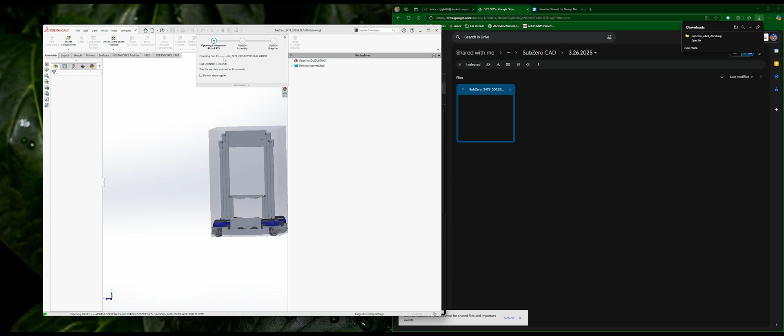A quick trick to find the one we're after: click on size, and there should be this Sub-Zero 2478 2025b dot SLD ASM file, that's a SolidWorks assembly file. Double click it and it should appear. Just wait for it to open, then a couple things to double check.

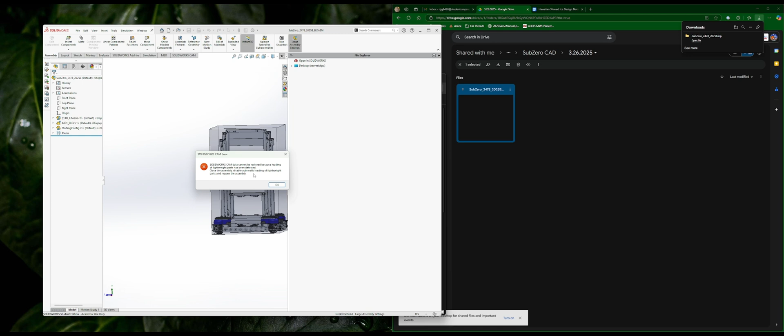This is all right, this just means there's probably a part that has some SolidWorks CAM data, and I have no idea what those parts are. You can just click OK, it doesn't actually affect anything.

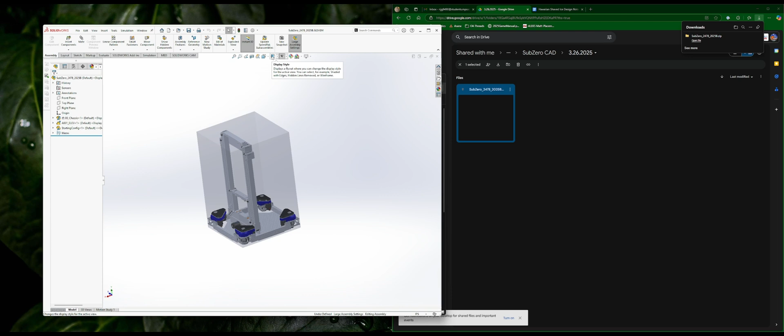Now something to check would be large assembly settings. You want that turned on, because otherwise it's atrocious to try to work with, so make sure to do that. We also want these lines, so you can maintain both by navigating to this cube and clicking the shaded with edges option.

Now you can see it's buttery smooth, even with your sub modules, which are the highly detailed things causing a lot of the lag.

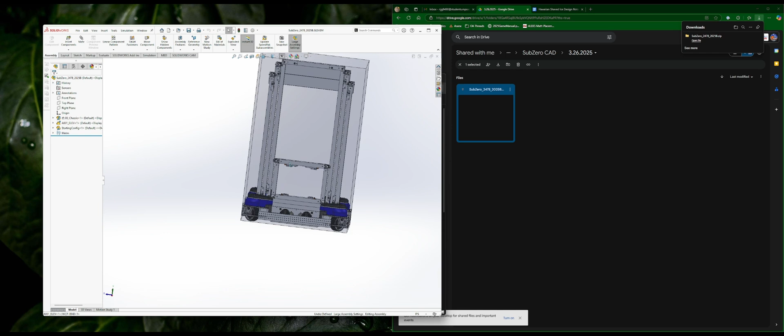As you can see, it has an elevator on it. We actually do not need that. If you want to play around with this elevator, go for it, it would be this one. But we don't need that, and we also don't want to be in this Sub-Zero 2478-2025B SolidWorks assembly file.

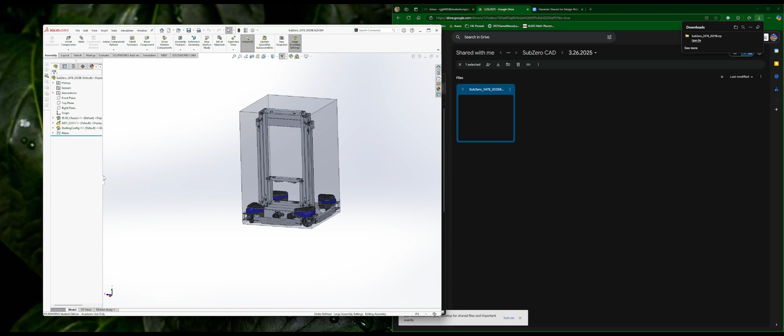We want to make our own new file that allows us to start over with organization, and in that file we just want the chassis and starting configuration. The reason you want this is because it allows you to see what the legal starting configuration with your specific chassis is.

In this case, it's the Quicksilver chassis that will be used. But if you're making a custom one for a different game, this box will change sizes, so keep that in mind.

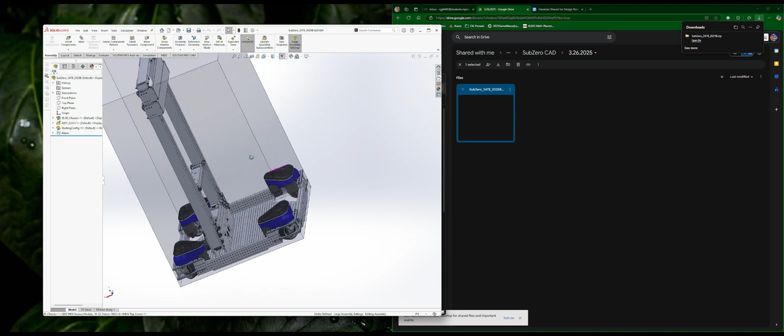That being said, you can leave this alone and simply click on 00_chassis. You can right click on this, and just to maintain a sense of orientation, this is the front of the robot, that is the rear. We can click on this, you could also do this, but I recommend doing the little telescope.

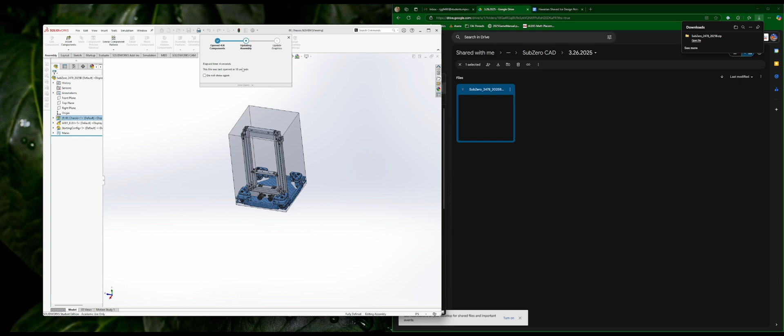It'll open the sub-assembly in position. Give it a second to load. So as you can see, it's oriented. So now this is the front, that's the back, but it's a little choppy.

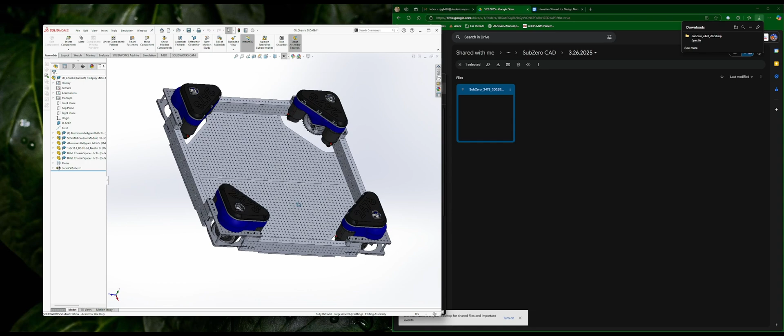As we can see, large assembly settings is turned off. This is something you may have to do every time, depending on how SolidWorks is set up. I personally do not know how to configure this other than by saving and exporting it with that option selected. Something about the Swerve modules seems to ignore that completely.

So as you can see, you have a couple different parts in here. You have a plane. This plane simply defines theoretically what should be the ground. This is an old chassis though.

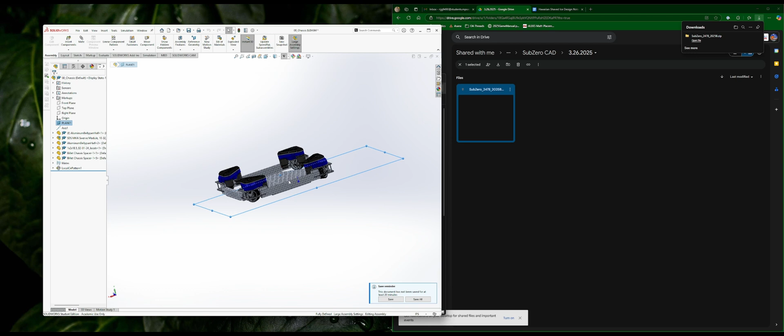Ultimately it's set to the height of this by, I believe, a 3.75 offset, which is the default for basically this bottom surface right here to the bottom of the wheel, according to the Swerve Drive Specialties documentation.

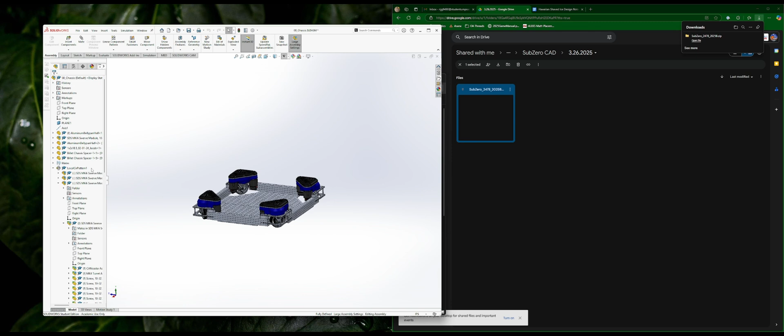That being said, we don't really need that, so it doesn't matter too much. This local circular pattern is also to make it easier to edit things. You have these chassis spacers, this specific part, aluminum belly pan half, which is the belly pan you can find on Quicksilver, and then an SDS module, and then the other one of these.

So now we basically just want to have this by itself in its own assembly. So what we can do is make sure to save that, make that asterisk go away, and then navigate to this little section right here.

Depending on how SolidWorks is set up for you, it may not appear there. It might be over here, or it could be over there. But find the icons that have like the home, the little piece of paper, the folder, the floppy disk, and the printer, as well as some other controls.

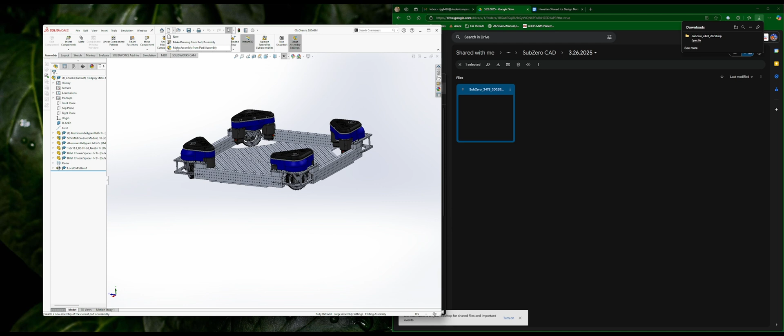Once you found it, click on New, and then Make Assembly from Part/Assembly. Make sure to turn that on. What this is going to do is allow us to use this chassis to make a brand new assembly, and this will become your main file.

So what we'll do now is save this. As you can see, we're in the imports folder currently, in the Sub-Zero folder. You can click on the Hawaiian Shaved Ice, and this one will be the main, so you can just call it main, however you want.

Adding a name would be preferable, so we're going to call this robot HSI, or Hawaiian Shaved Ice. Make sure to not include any spaces, as that can cause issues with exporting. Also, with some computers that may not be possible, especially if you're using Windows 10. Windows 11 is capable of handling spaces, but that's not a guarantee with all computers.

Using underscores is a great way to do that, as long as you have main and then the .SLDASM extension. But you could delete this; it'll automatically fill it in, so it doesn't really matter. This can just be in the Hawaiian Shaved Ice folder. Click save, and now you have your new main file.

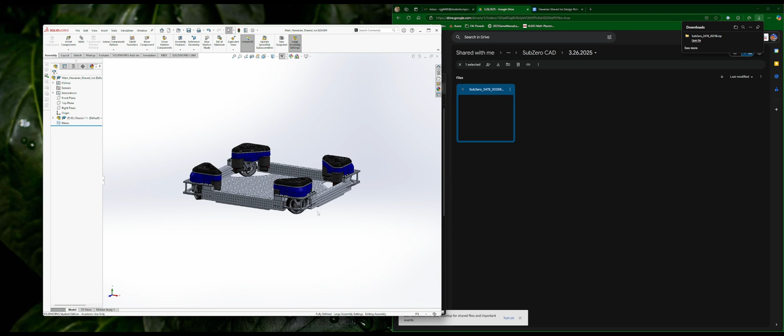This will not have any individual components, with a couple of exceptions, which I'll go over. It'll just have your sub-assemblies, however many there are, as well as those additional few parts, one of which we will add to the assembly.

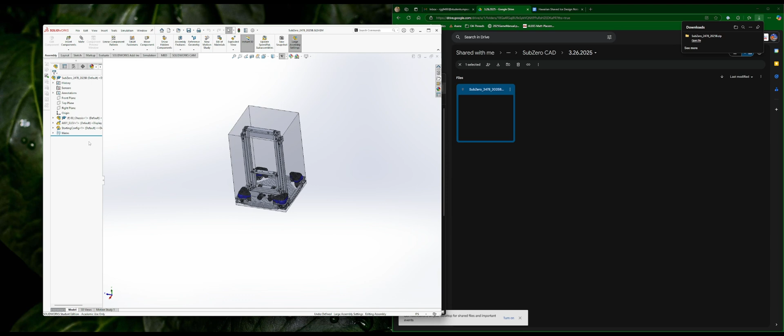In order to do so, we're just going to click on the Insert Components tab up there, and you could go browse, but we know that the part we want is in this folder, and it's this thing called starting config, which is your starting configuration.

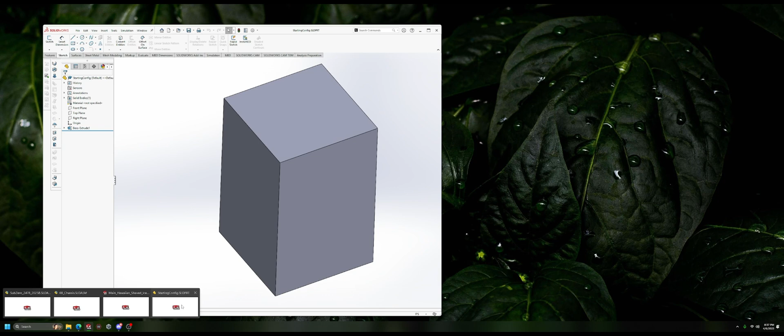One shortcut you can do is simply open it. It will be opaque in here, but that's totally fine—this makes it easier to mate to other components. Navigate back to the main assembly, and then click on insert components again; the starting config is present.

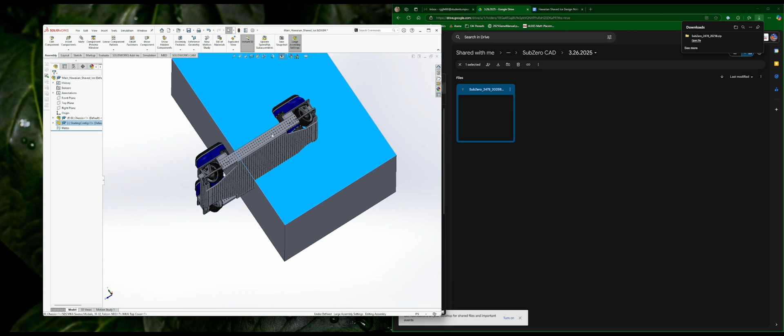You could just do that and it may work, but don't. Drop it in as you would any normal part—you can move it around and stuff.

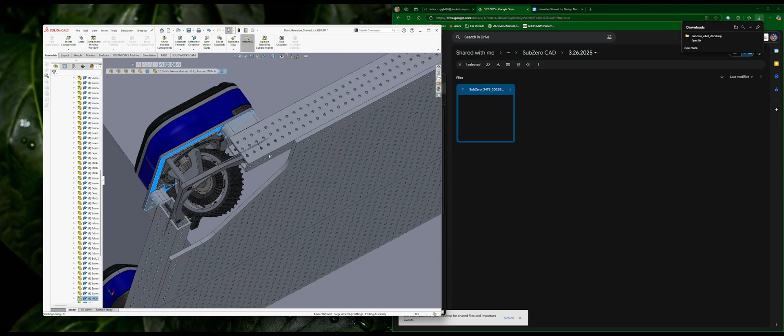The bottom will be easier to do, and it's basically the same thing. Theoretically, that ground plane should be 3.75 from this specific top surface right here—not this one, it's this one. Then you can hold shift and click on this bottom face.

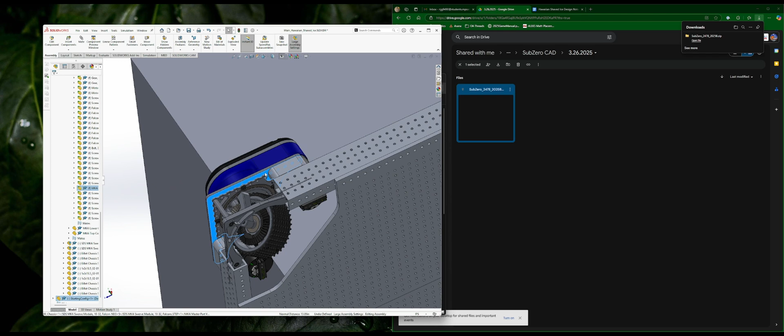When you release shift, if you're careful and move your mouse, you'll see the mate options right here. If not, and it disappeared, go over to the mate tab in the top left—it'll default to coincident, which just means they're on the same plane, kind of. We don't want that; we want a distance mate, and in the right direction. As we can see, it's currently correct, so we don't have to invert it.

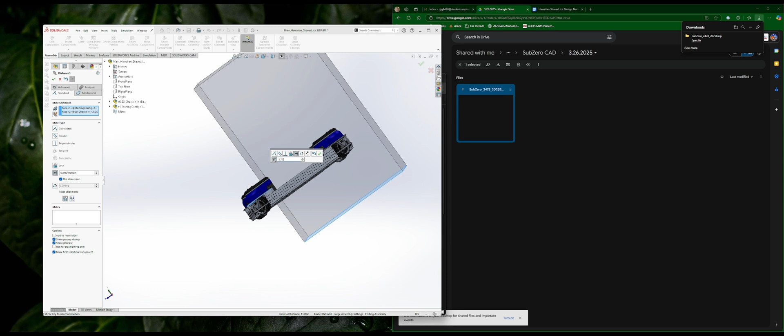So you could do 3.75, and then do a visual check. That looks about right. But let's say it was in the wrong direction, positioned over here theoretically—one thing you can do is use a negative value.

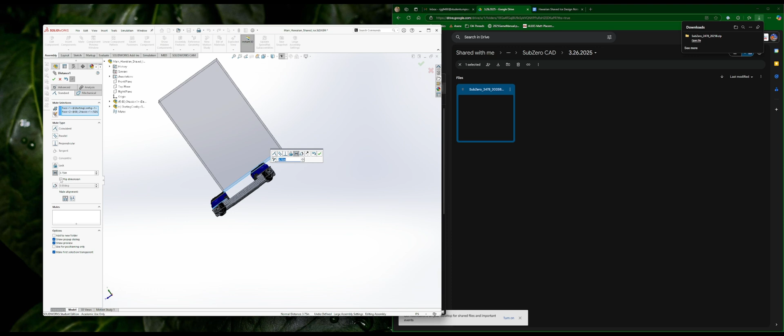Just kidding—you basically just click this flip dimension button right here. It's not doing it for some reason. You can click negative—never mind, click this one—just kidding, you can click this check mark. No, you can't, I don't know what's going on. Okay.

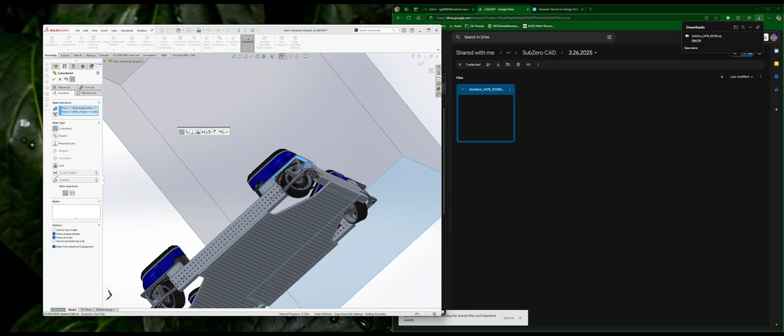We're going to retry this. Let's say it's like this, and it's on the wrong side. Highlight the two using shift, then mate, click on distance, and do your 3.75. Check it—it's definitely not right. You can then click on flip dimension.

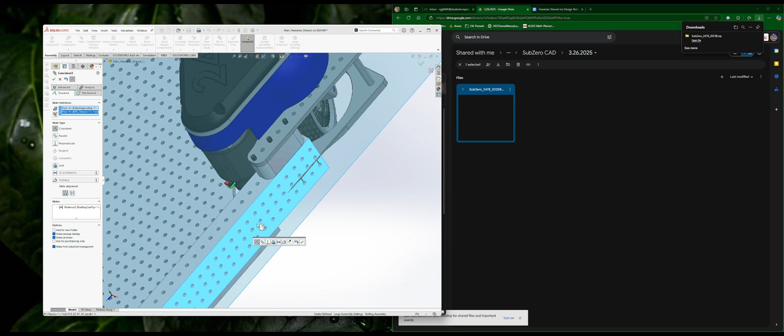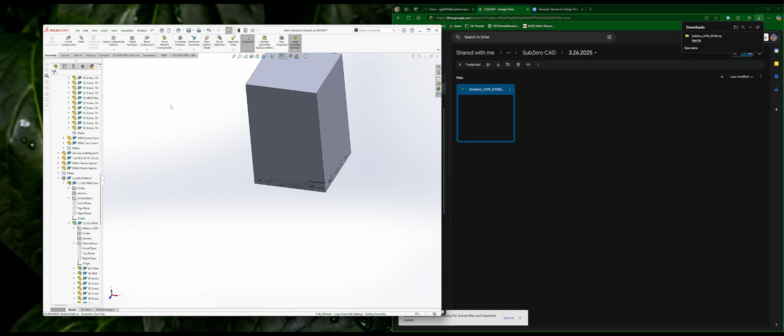It probably only works once, and now you're in the regular mate tab. The nice thing is you don't even have to hold down shift—you can simply click on that, then this one and this one. Make sure you're selecting the face and not a hole or something that could complicate things. You can then click this green check mark, or don't click undo—I usually just click green, or in some cases just press enter.

So now you have this box, but it's kind of blocking your view of what's inside, which isn't very helpful. So what we're going to do now is change the transparency. If it's like this, hover over it, right click, and navigate over to this little thing—it should have an eye and a little block icon. You can just click on that.

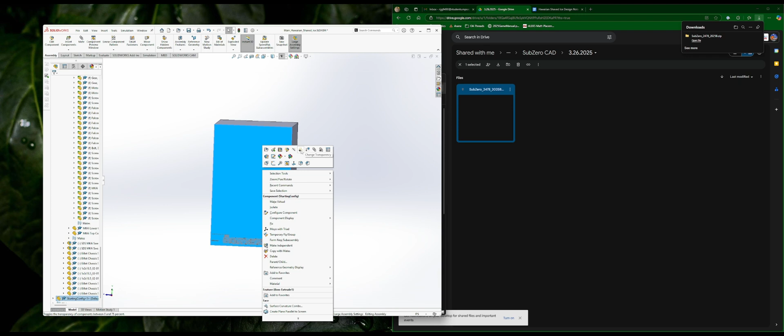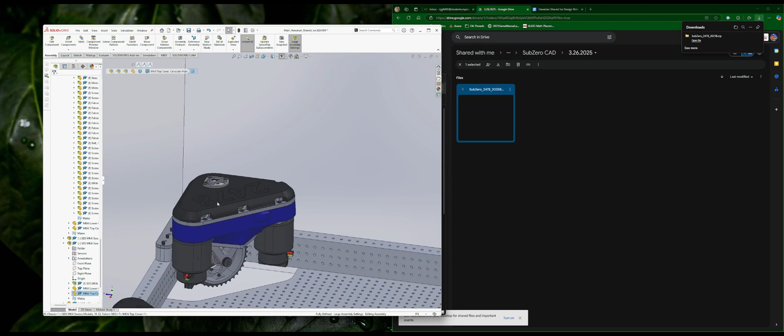It's not the hide components one, it's the change transparency option. Now you have your starting configuration. Keep in mind, if you try to make two subassemblies—let's say we select this face, and then the face on this one—it will actually highlight the transparent one. We'll revisit that later.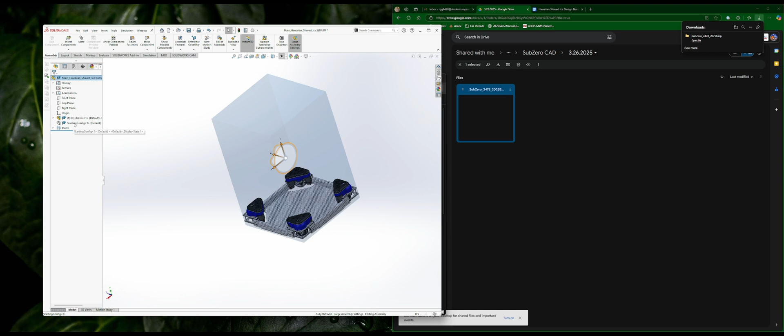But basically, if that ever happens and you just need it to go away, you can click on hide components and it'll disappear. Always make sure to locate where it is in your folder, or in the little tree—it should be at the bottom. Remember, this is in main. You can reshow it if you hit it, and always make sure to save, save, save, save.

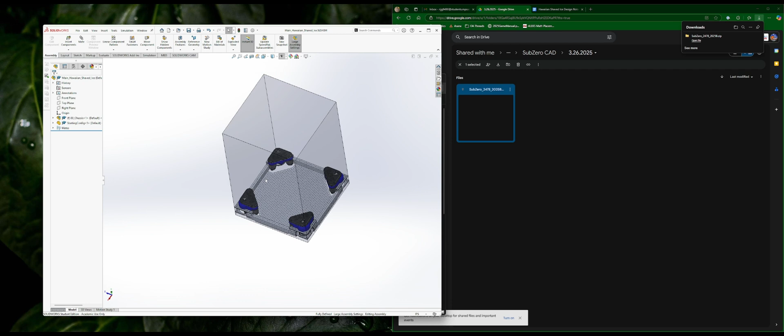As you can see, the asterisk went away—that's how we know it's saved. And now you have the drivetrain set up for the next couple of steps.